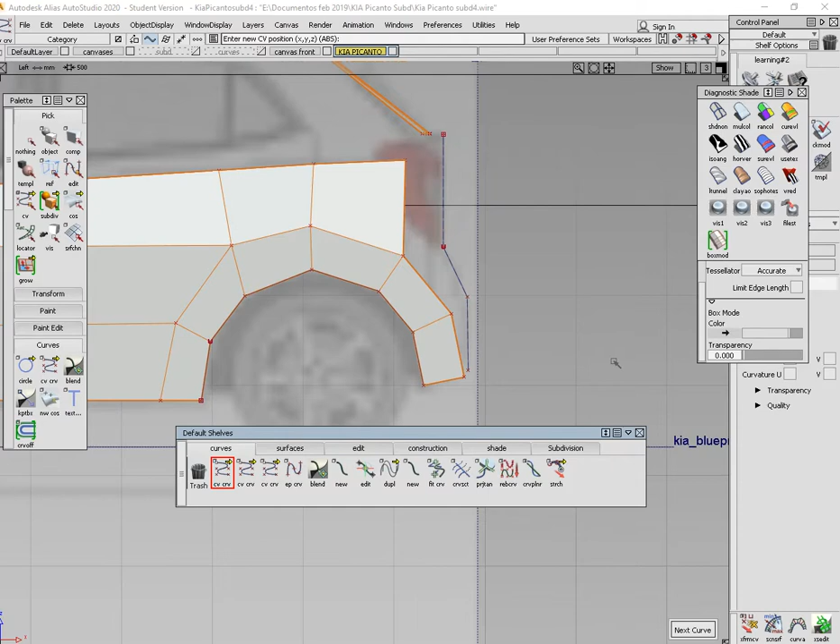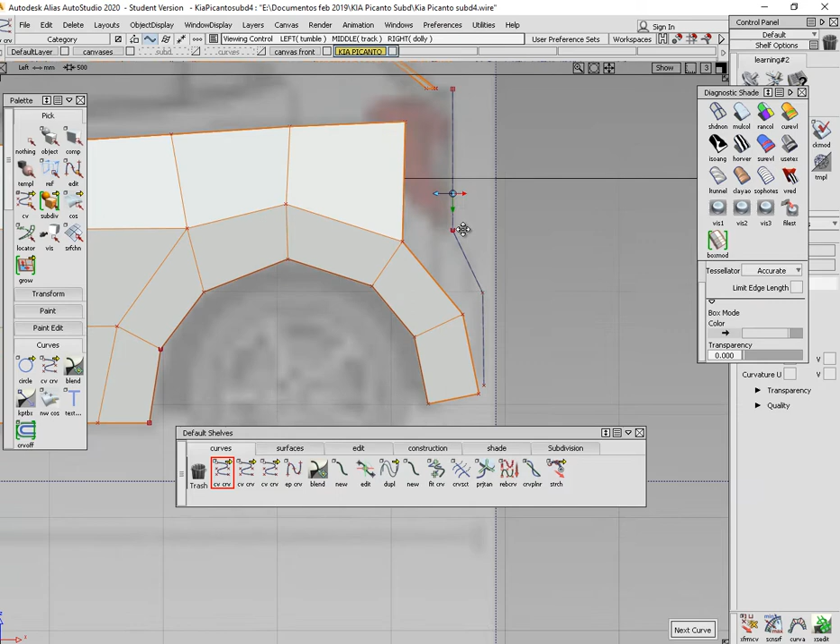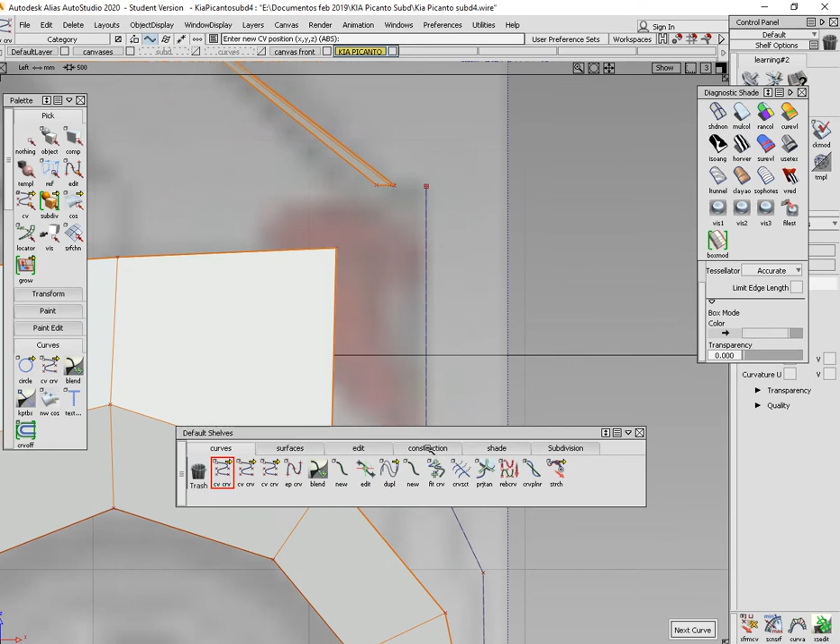Okay, so here we need to build the rear part, so we can merge this, the rear with the side part. Now I'm using this technique again as I used in the previous videos. I'm using a 1-degree curve to build these 3 edges here, so we follow this shape. Then we can use the bridge tool to merge those. Here I'm not using this straight line, then when we are extruding this line, we're gonna bridge this gap.

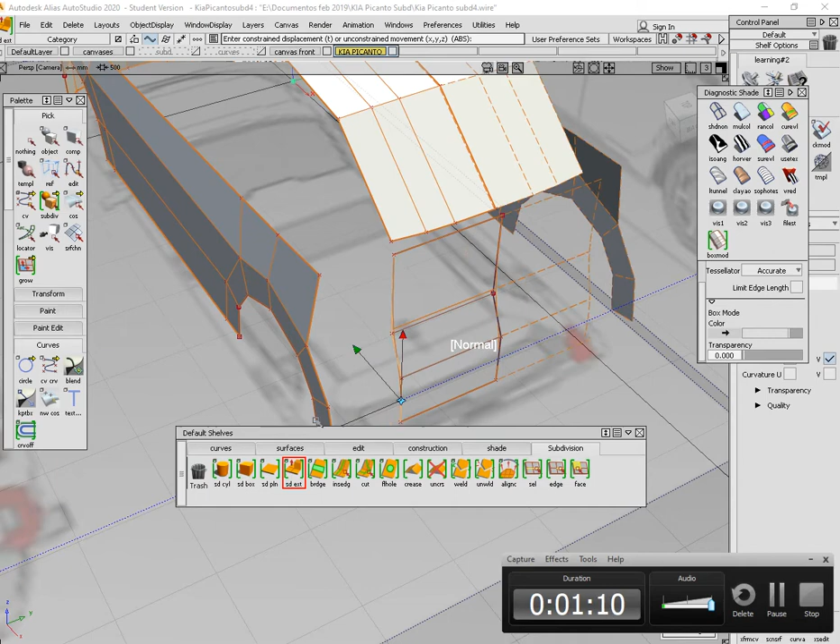So if I go to my perspective view, I'm going to use extrusion, extrude this line in this direction. So we're gonna leave it like here, more or less matching this vertex right here, and then we're gonna build this bridge.

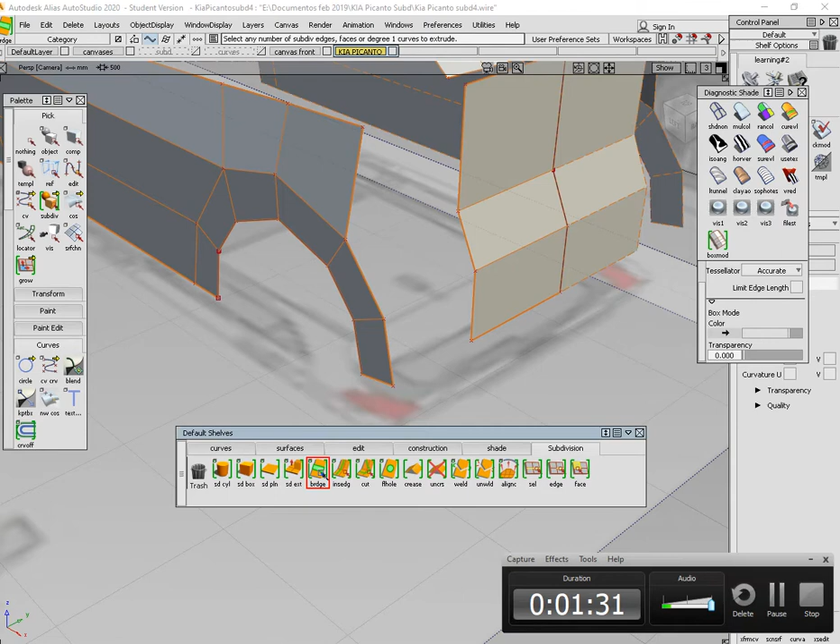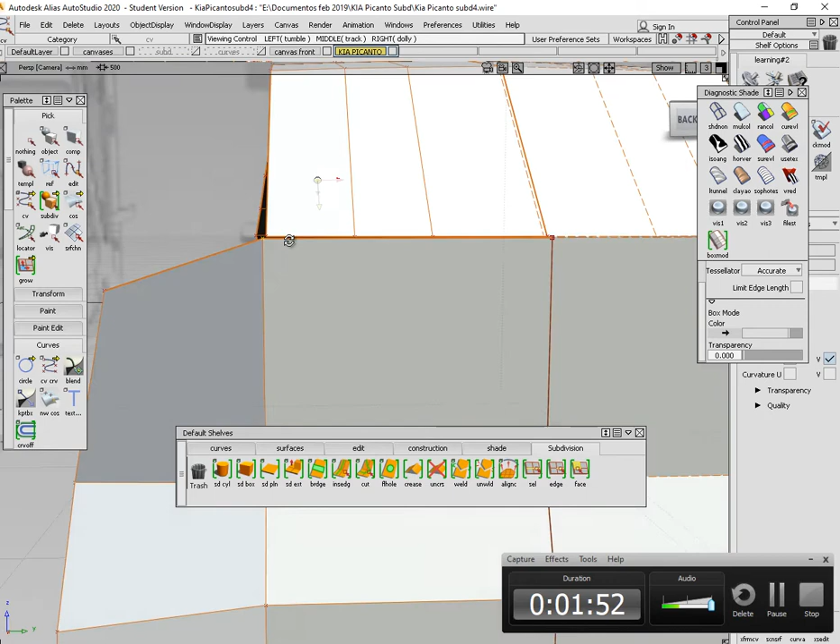So we can do that now. I'm gonna use the bridge tool, select these edges and these edges, then bridge, create. And then we only have to take this vertex a little bit down.

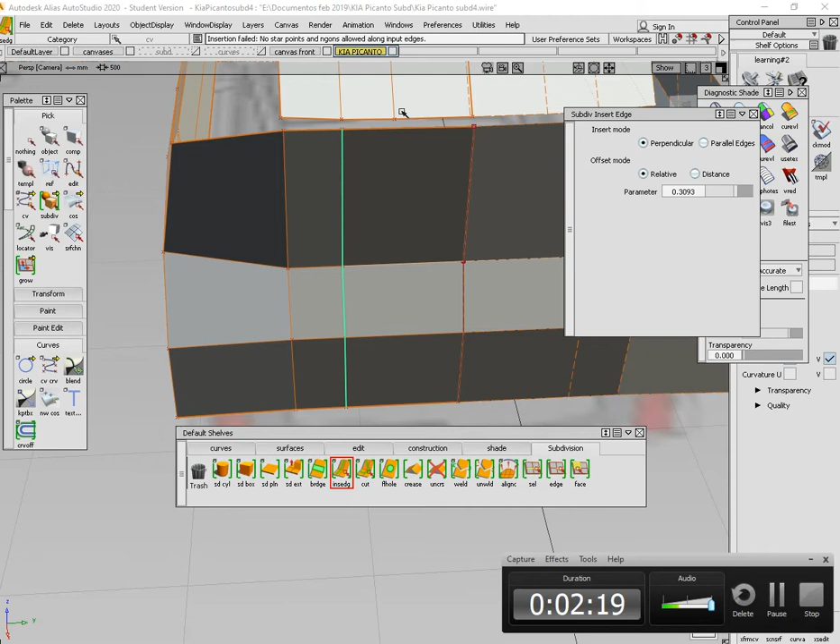And here, okay, now all we have to do, I'm gonna take it inwards because you know this part is a little bit curved, so now we need to add more geometry here to match the polygons here, so we can bridge. Insert again.

More or less there. Okay, if we want to position all of this, we can go to the top view. And first move this like so, it's like so.

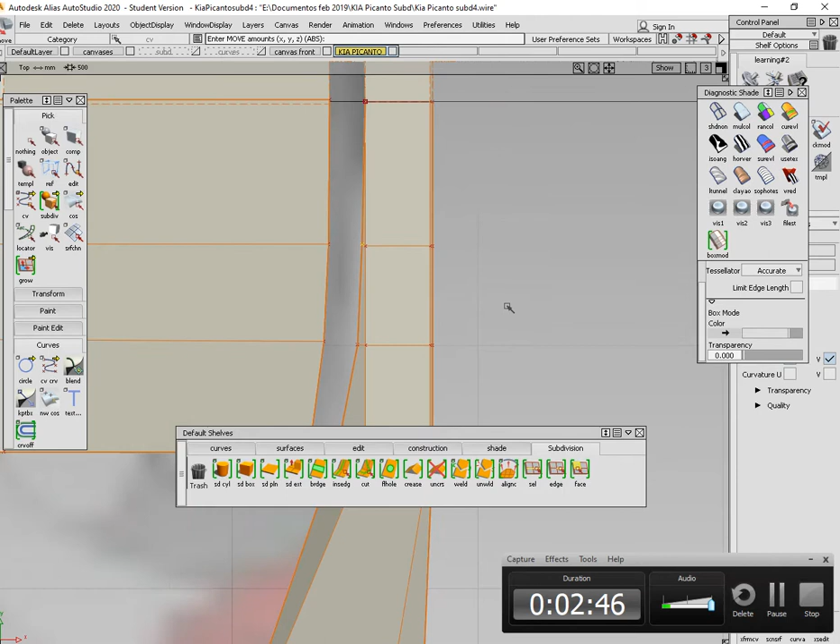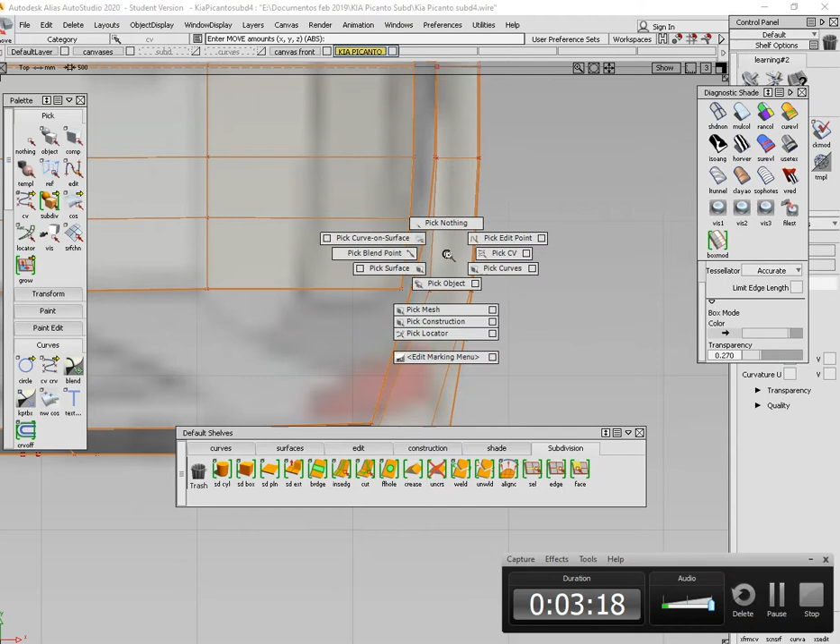And now we're gonna give it a little bit of curvature here, moving this inwards and these vertices again inwards. Like so, I'm gonna turn my transparency on just a little bit so I can see what I'm doing here. I'm gonna move this in too, so we follow better the blueprint. And this CV, move it like so, and this here. Okay, so now we have this gap, then we can close with the bridge tool.

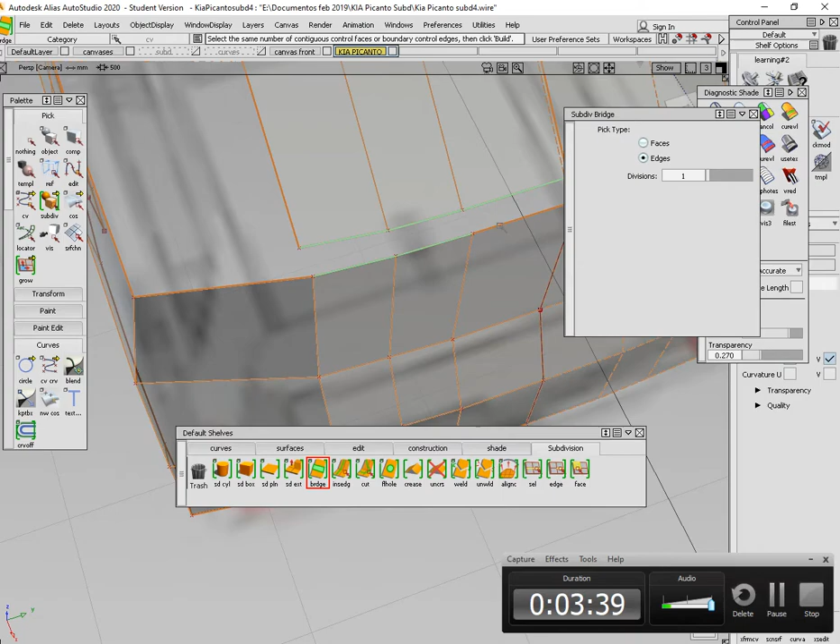Okay, select all these edges, press build, and we have that extra part we needed here. So that process is, I think, better for building these kind of quick edges, you know. It's like building the side, building these, and then bridge everything together. Like in this part too, we build this side, try to match the polygons, and then bridge, instead of taking

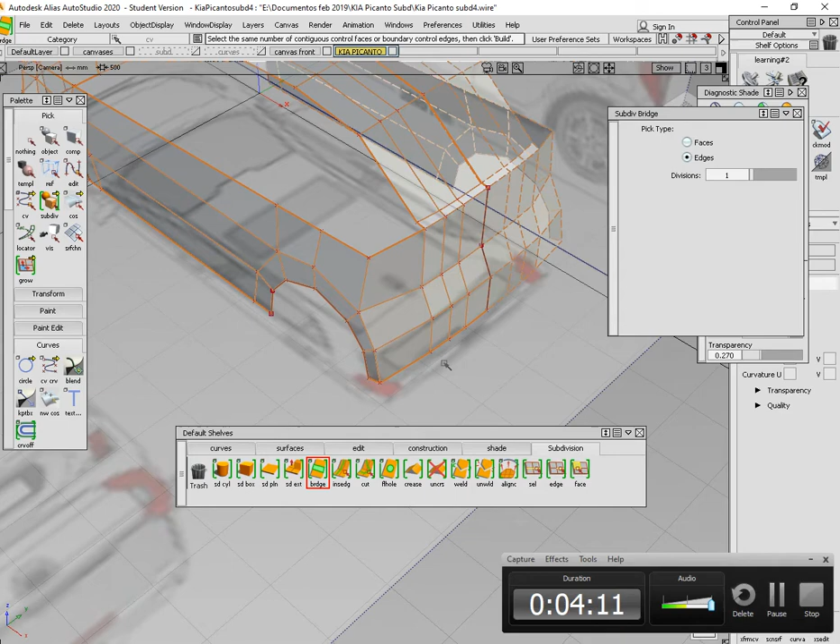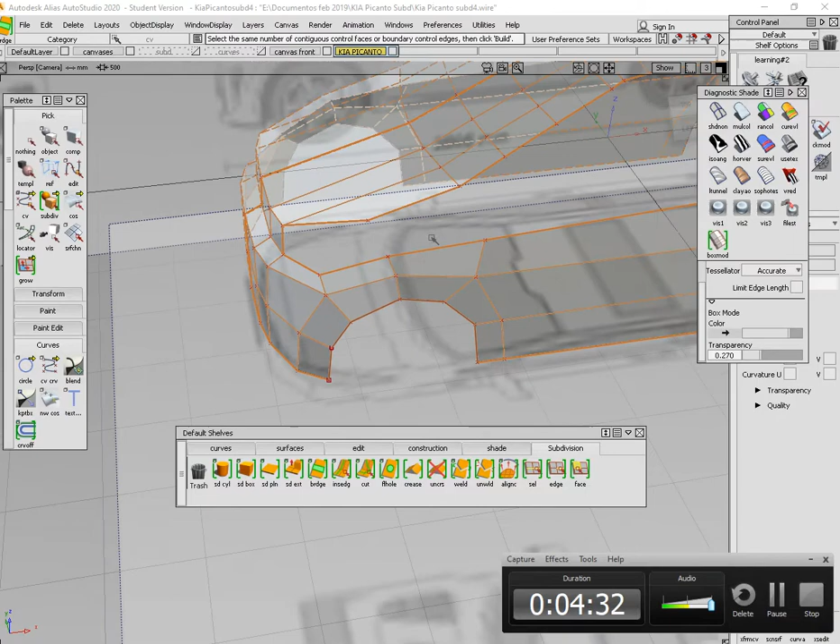this edge and extrude, and then extrude, and always do extrusions. If you build little by little parts of the car, then you can bridge them, so we can create the rest of the geometry in a very easy way. If we pay attention to try to build the edges parallel, with the same number of rows of vertices, then it's gonna be very easy to bridge.

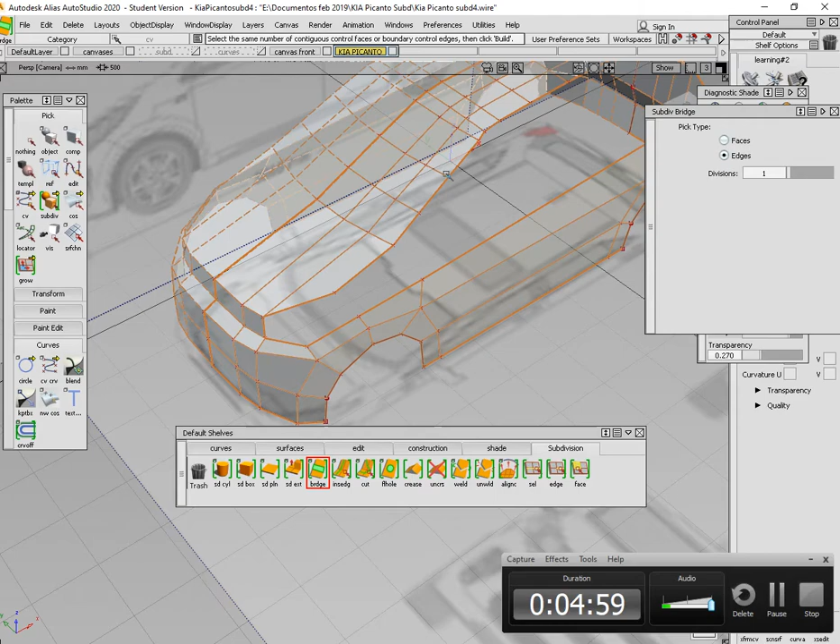Don't worry too much if we have here, for example, a lot of geometry, because we always can use the weld tool to weld these vertices and get rid of this row of edges, so we can simplify the geometry.

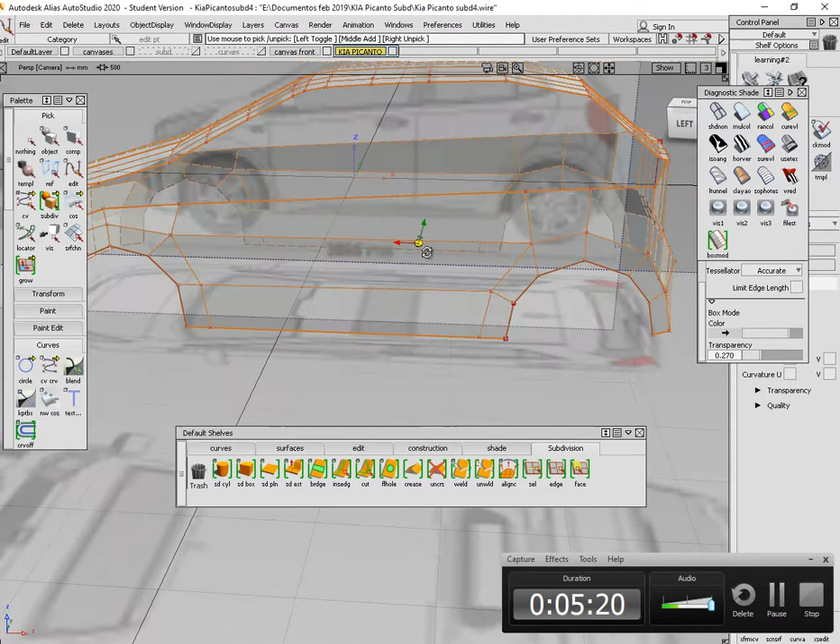And that's another strategy of modeling. When we can complicate the geometry a lot, but if we want to simplify, we can do it by using the weld tool or by deleting some polygons and rework the mesh again. So don't worry too much about that. We are starting very simple, and then we will get more complicated if we need it. It depends on where we want to take the model, or where our supervisor or our designer tell us to go with the model, a very basic model, or if we need more detail.

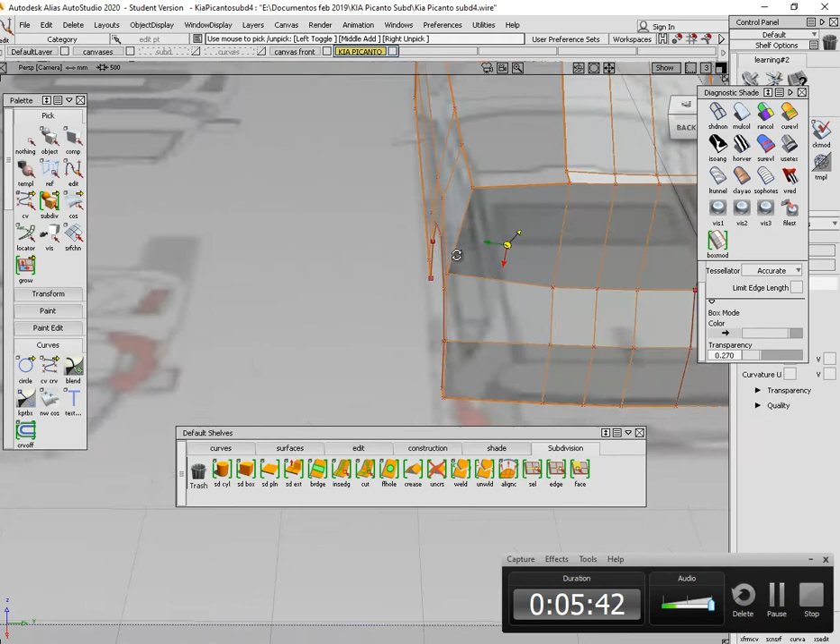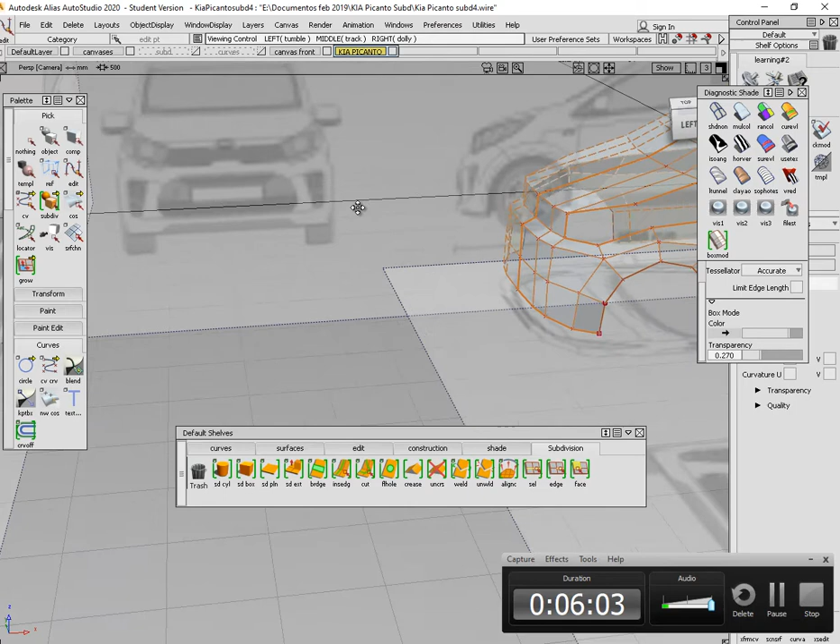But with cages and with polygons we start very basic, and then we can cut out some details, like for example this front grille aperture here, or these apertures, or the grid details. We can do it later. If we try to build these from the start, we're gonna be creating a very complicated mesh in the first stages, and that's gonna complicate us with the rest of the model. So we first build this kind of thing, and then we can add more geometry to cut holes and add details.

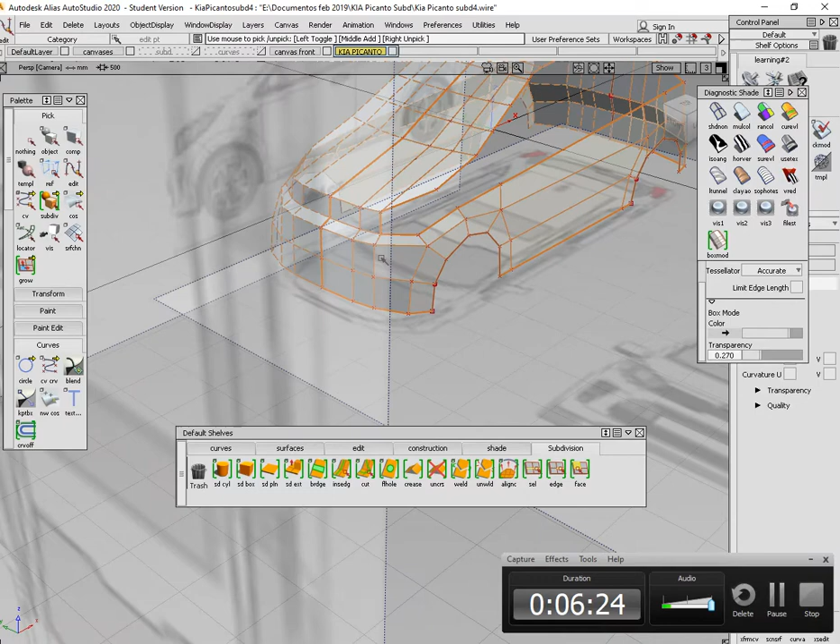Okay, we have this part of the model closed. Let's check it in this side view. Okay, this is nice for now.

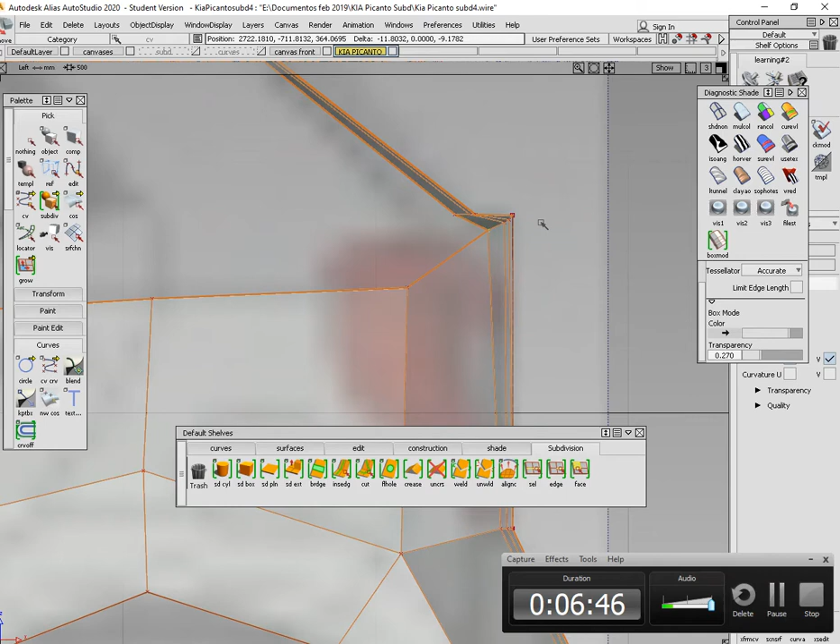Yeah, maybe this CV we can take it down a little bit, like so. Have more curvature here. Rearrange these CVs to have a better shape. Yeah, this is a straight line. This is good.

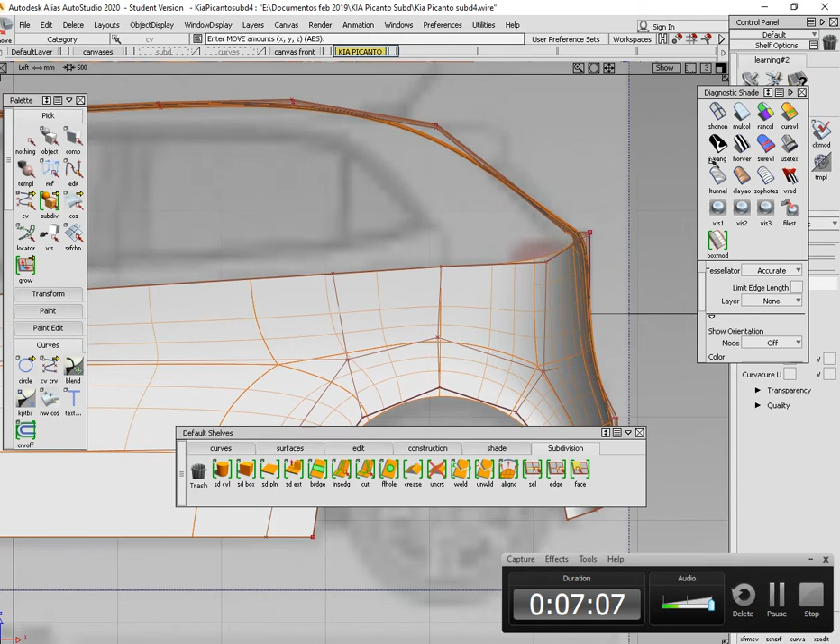And as you can see, I'm not testing the sub-Ds much, because first I'm concentrated on building this very simple cage, trying to guide the feature lines, and then I will start to add more geometry.

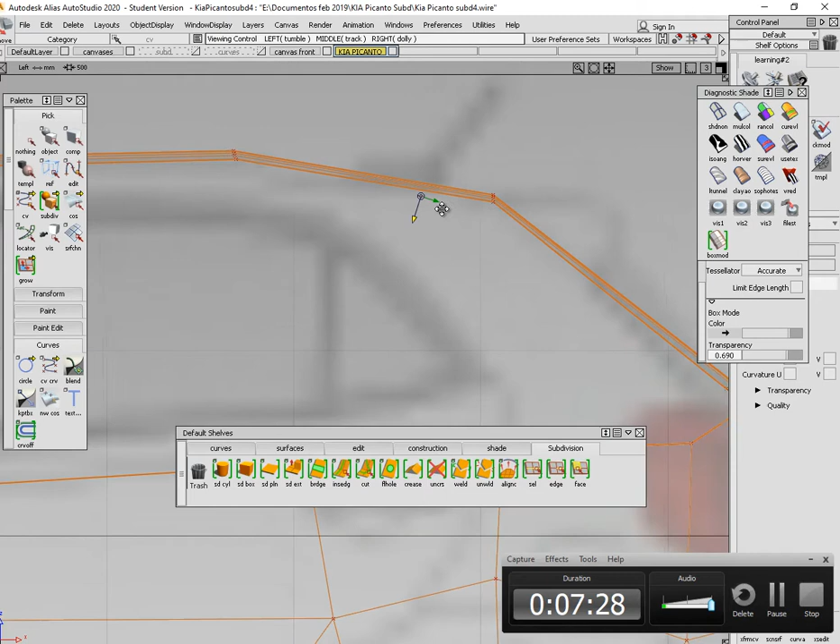Refine my model. Okay, so with this selected, I'm gonna take the transparency up, and I'm gonna use this shader now, because I want transparency a little bit down.

Okay, I'm gonna fix this curvature here, trying to build a little radius here instead of this bigger one. So what I'm gonna do is try to insert.

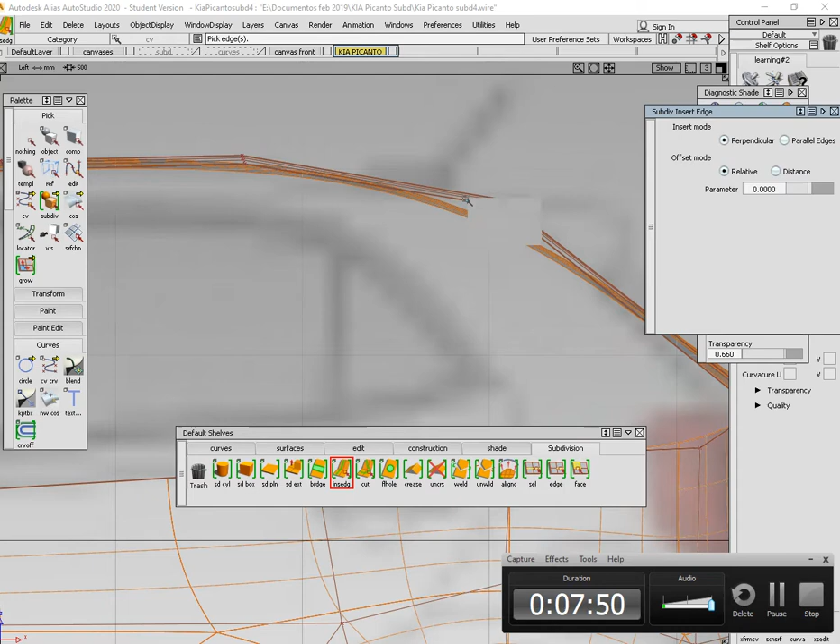Okay, so we have to select this, yep, and move it like so, more or less. Okay, and now we're gonna insert another one here, in the same fashion we did here.

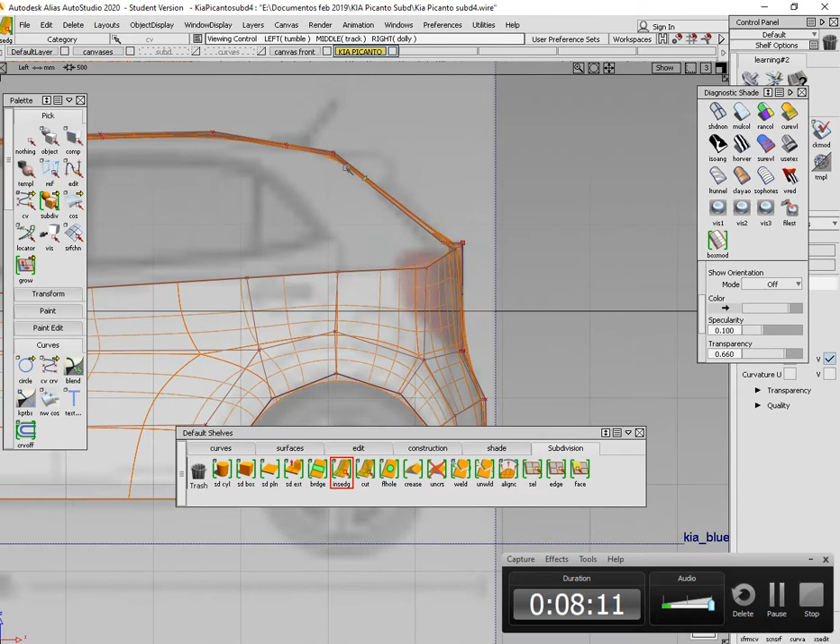Okay, so we can do this blend a little bit better. Yeah, and I have noticed here that we are not matching the reference, because our side glass, sorry, our greenhouse here goes like in this shape. Okay, so don't worry, because we can fix it.

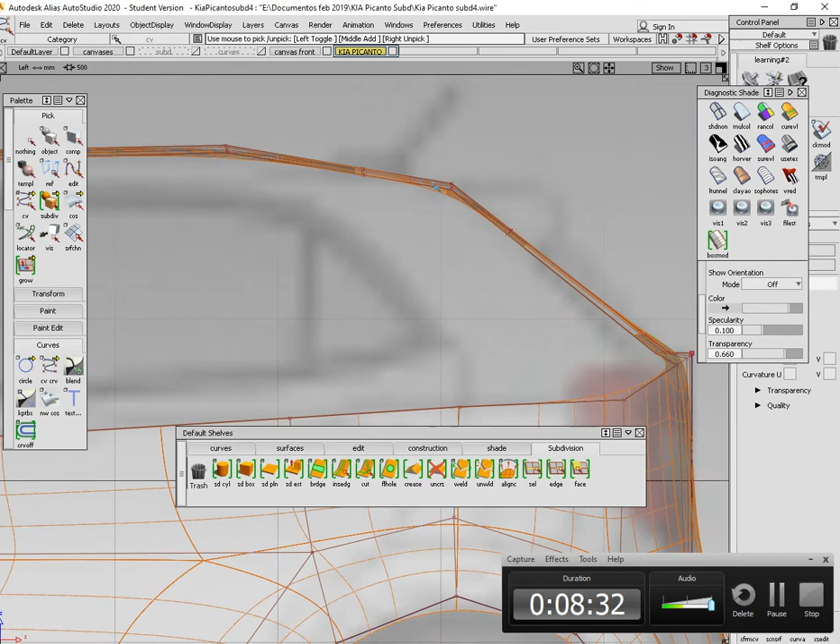If we move all of this like here, okay, yeah, that's nice. And the CVs, oh, the CVs are right. Okay, what we need here is to add more geometry.

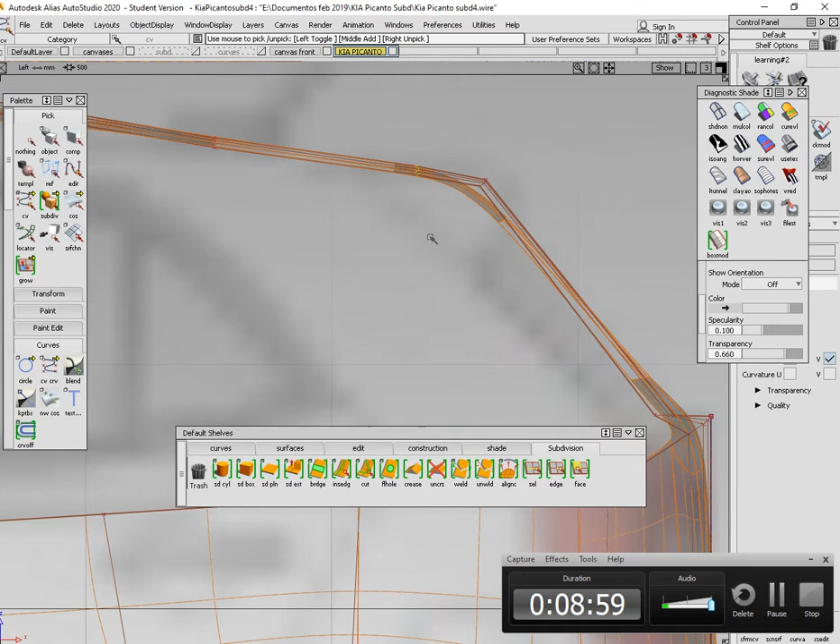I'm gonna move this a little bit up, like so. Move this up, and these vertices up, and take them to this position. Yeah.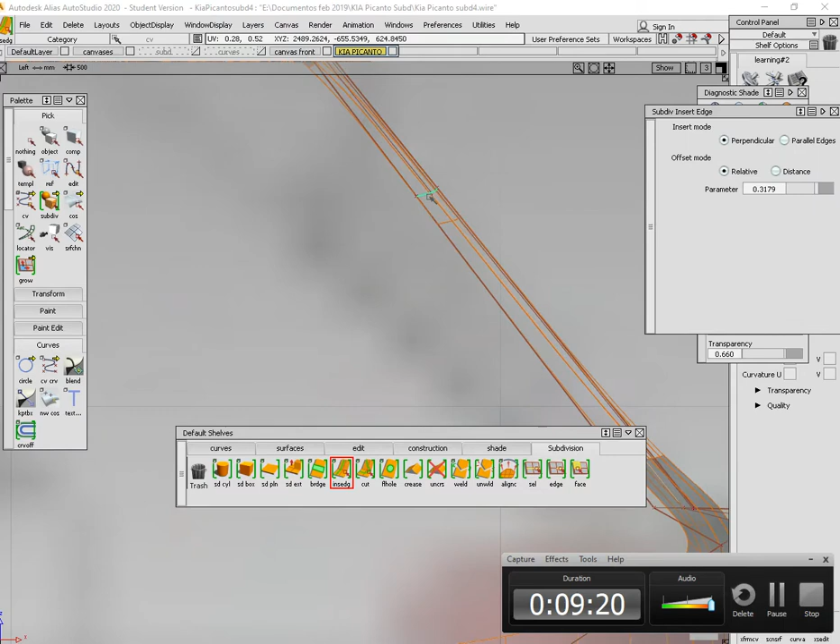Here. And now I'm adding just a little bit more geometry here, as we did it in the windscreen, in the front windscreen, so we can control better the curvature of this spot.

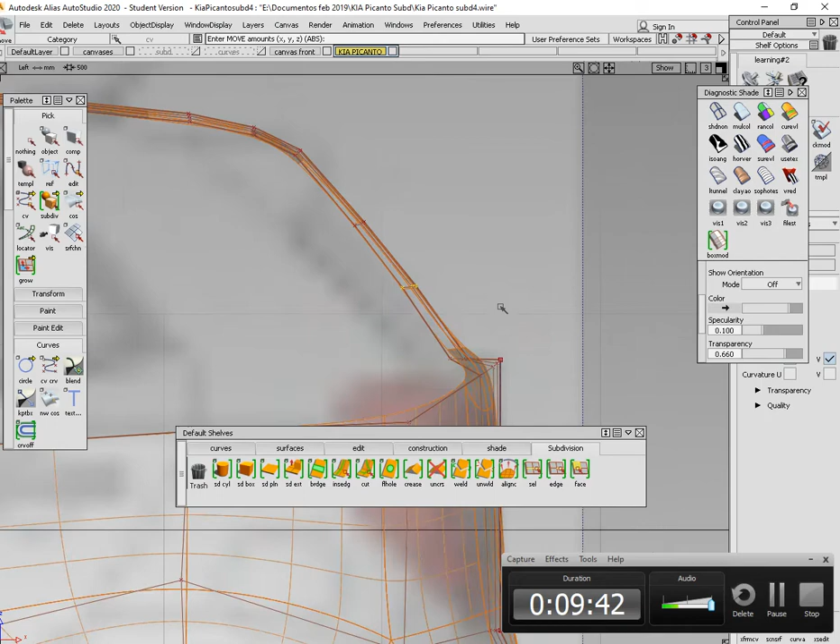Okay, let's move the CVs like so. We always can check our model in perspective, so we can see what we're doing. I'm gonna take the transparency down and see what we got. Okay, so for now it's good.

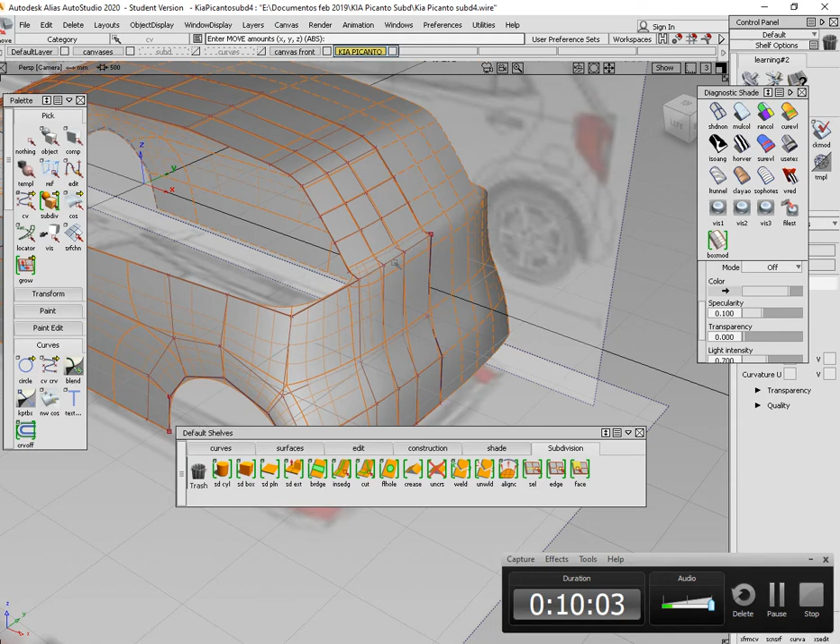As you can see here, well, if we refer to our model here, in this line, okay, this line we have a hard edge, a little radius there, but we're gonna be covering that in next videos, how to do hard edges, as well as we will be doing in our wheel arches. For now we have the geometry, and then we can add more geometry to try to make a hard edge around the wheel arch.

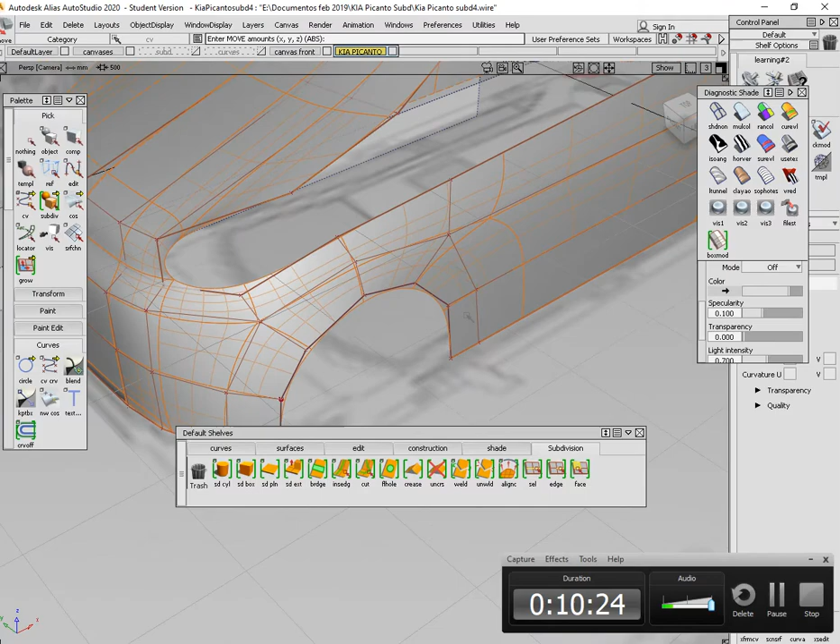Okay, so our main goal now is to reveal this sketch and try to close it. So in next videos we're going to be building these parts in the middle and the side glass and the rails, the cant rails.

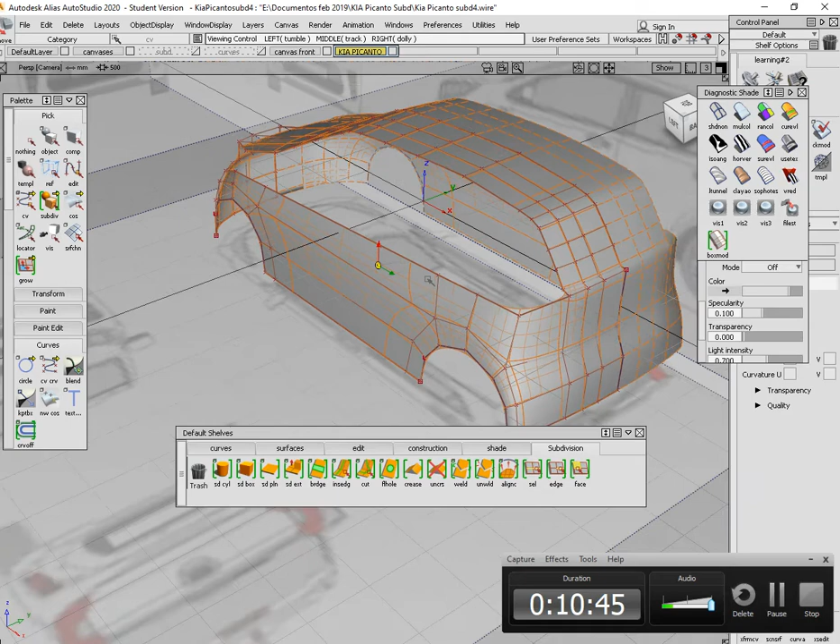Okay, so to finish this model and this video, I'm going to extrude the wheel arches to do the insets here.

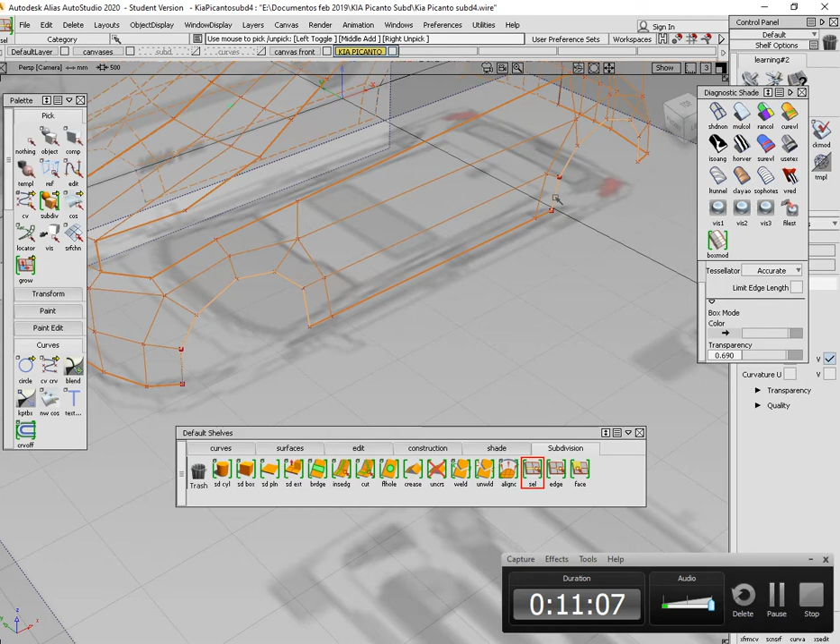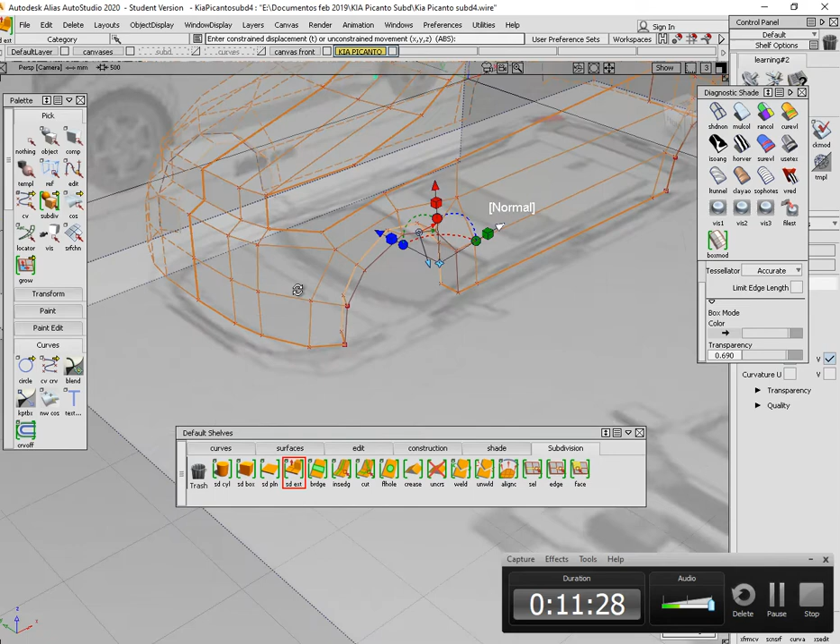Okay, so select these edge loops, and I'm gonna select this one too, and do an extrusion in this direction. Okay, I'm gonna do it again and select this one and do a little extrusion with this, and look what happened. Instead of doing the extrusion straight in this direction, here it's causing this kind of problem.

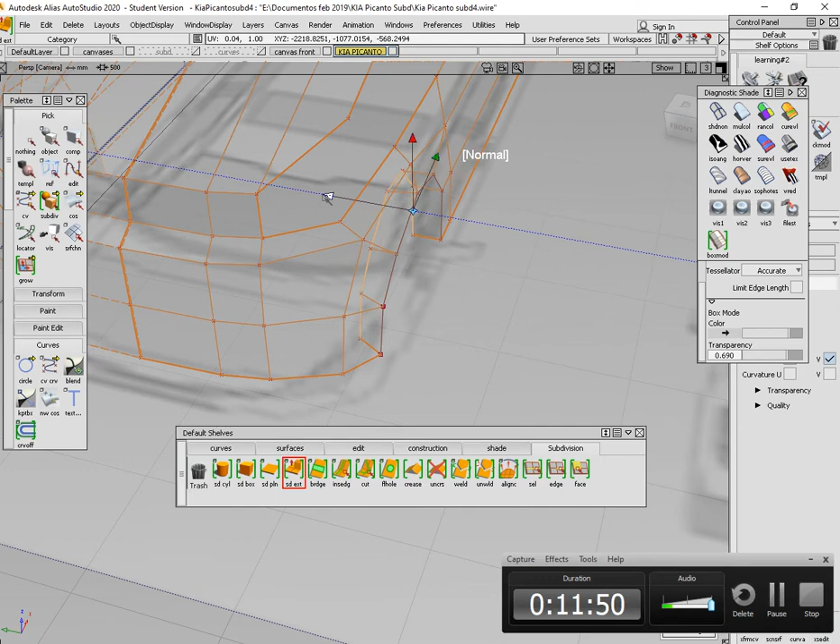Let's say it's not a problem, but it's because our line here is not straight, because we have done this curvature. Okay, so I'm gonna do this little extrusion, leave it like there, pick nothing, and now I'm gonna take my edge loop. Okay, I'm gonna go to top view.

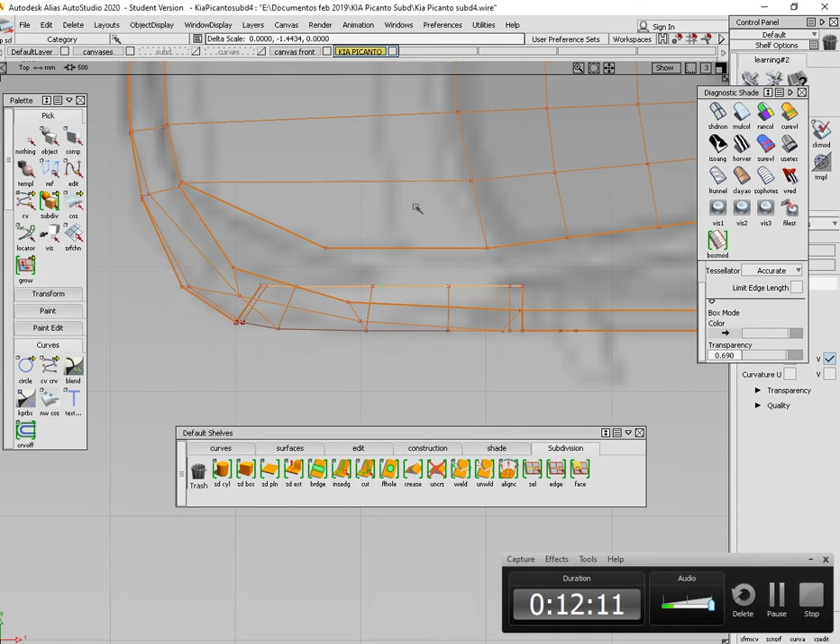Set the pivot to center, and straighten this line. Okay, and now I can move the CVs like this, try to match with in this direction, okay, to have our cage go in the y direction.

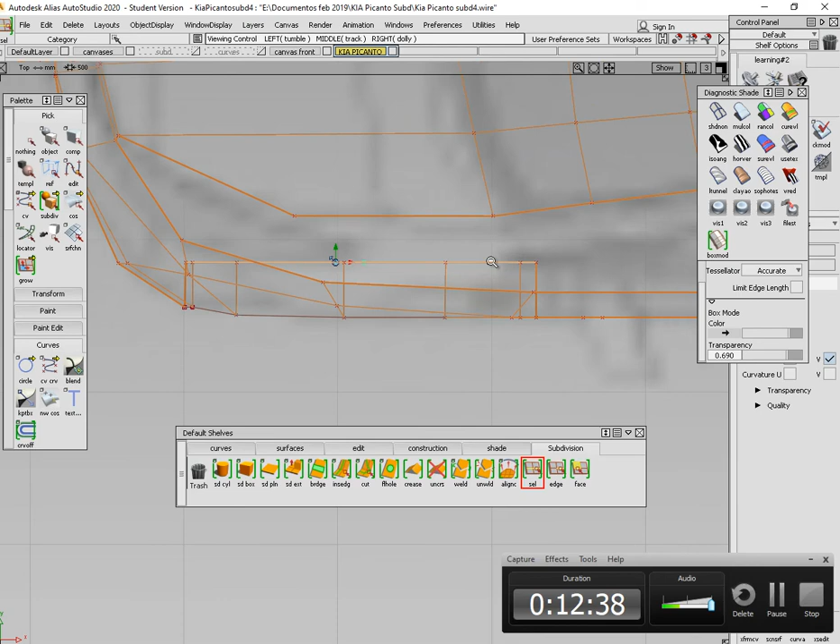Okay, nice. And now if I select them again, my edge loop, I can move it a little bit inwards. Okay.